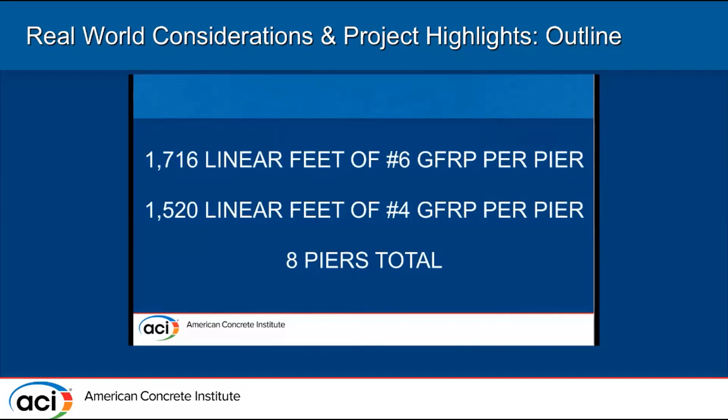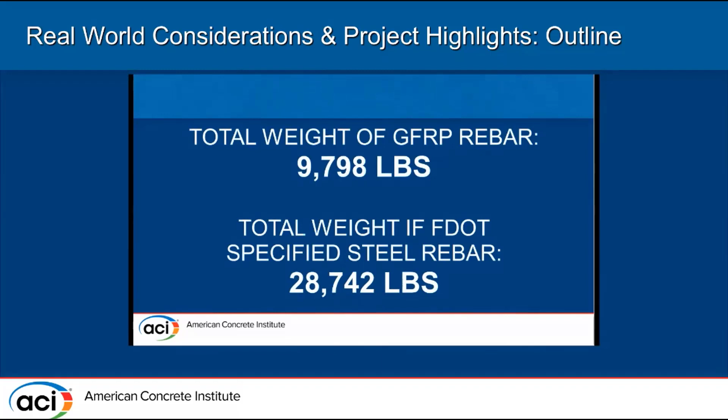So the FDOT hired us to do repairs here because they had some spalling and corrosion that occurred in the tidal influence zone, because salt water impacts that area the most. This part here, you can see the thickened slab. Here we used number 6 bars for our verticals and number 4 bars for our horizontals. It was so much easier to install compared to regular rebar because it was so much more lightweight. We had to tie our divers off, and if you're dealing with big heavy bar in this area with a mat and divers in the water trying to put it in place, it makes it extremely difficult to handle that heavy weight.

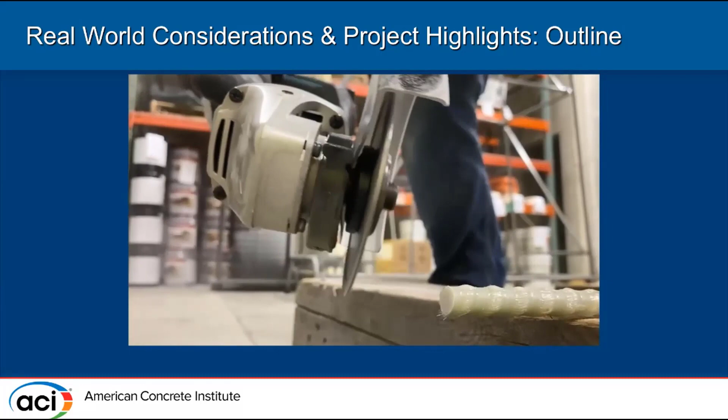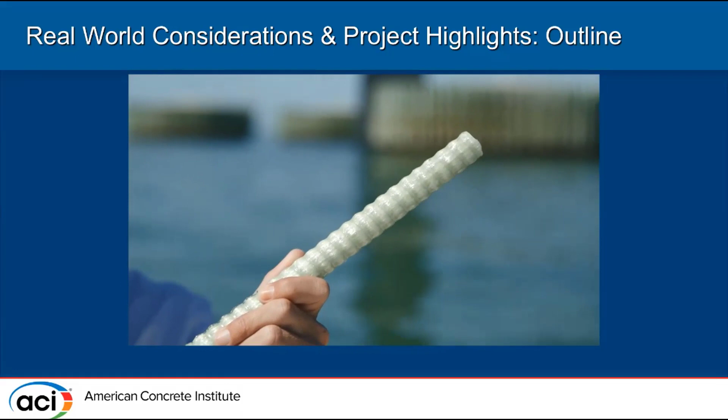So this project was my first encounter with the GFRP bar. Since then, we've been using it on other projects. It was easier to cut. We were able to take it with a grinder and cut it much faster than regular steel. As a matter of fact, by the time we were done with the project, my guys said, I wish we could use this on every project. It's so much easier to work with and it's so much lighter. And when we were pre-tying cages, we were able to set it in the water with our divers. So we had no issues with any of that. Steel bar, we would have.

Yeah. So a big thank you to Mike for providing that testimonial.

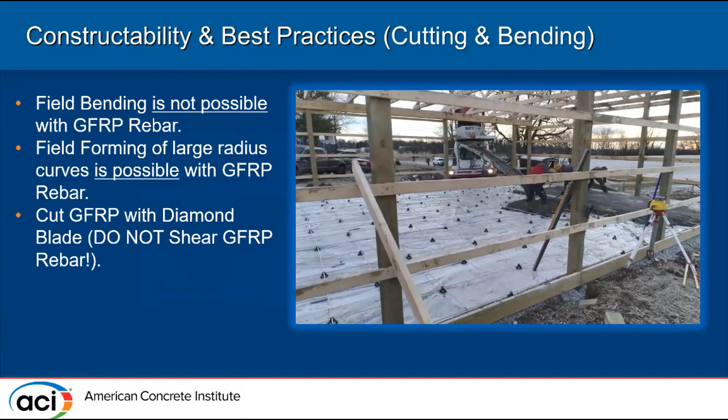But moving right along, constructability and best practices when using this material. What's the actual nuts and bolts? What's this going to look like right there on the job site? We've already mentioned one big difference, field bending. It's made with a thermoset resin, and just by the nature of thermoset resins, there's no field bending with GFRP rebar.

That means all of the bent and fabricated rebar pieces, regardless of manufacturer, are to be made at the factory level and sent to the job site or to the distributor for stocking shapes and whatnot. Field forming of large radius curves is possible with GFRP rebar. And there are some authoritative formulas to be able to keep that within the bounds of serviceability of the actual

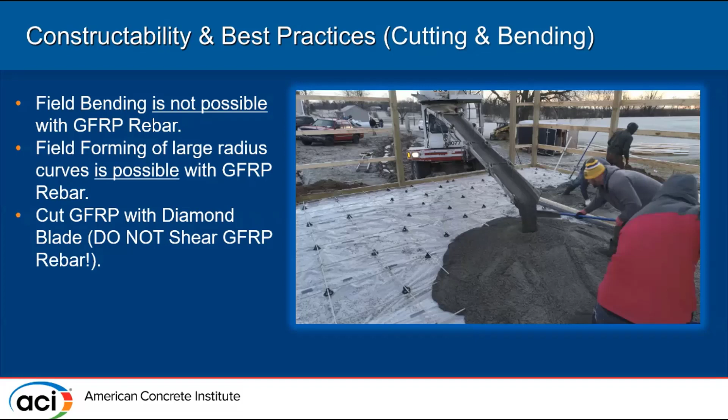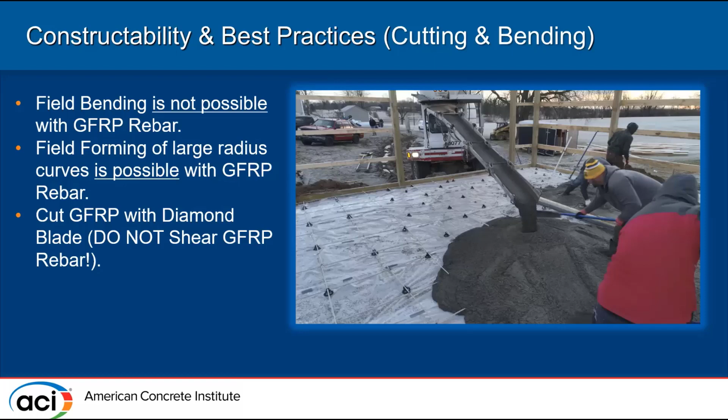bar. Cut GFRP with a diamond blade, we would recommend that. Do not shear GFRP rebar. I've seen some contractors get bolt cutters and cut the stuff. Don't do that, is what we would say to the contractor, because we don't want to damage any of the load bearing fibers going deeper into the bar. So if you shear that with a bolt cutter, obviously that could give some performance issues. But with a diamond blade, it's going to cut right through the stuff.

Moving on. So the bent bars, like we've already talked about, have got to be preformed in the factory. Some key considerations as performance varies from manufacturer to manufacturer. So again, I'm gonna hit this topic time and time again for the A&E community. You got to know your design criteria, and you got to know how to communicate or specify that for the contractor. Okay, so get to know some of the manufacturers, get to know some of their capabilities, and design accordingly.

So currently, some of the quality control, quality assurance currently qualifies bent bars at the bent and straight portions, and you'll see that in ASTM D7957.

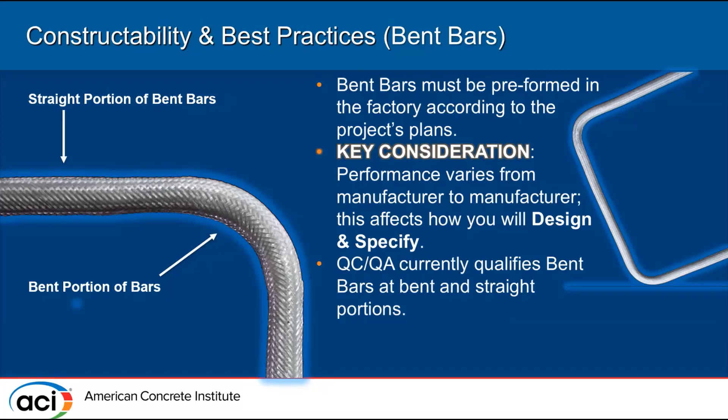All right, so steel ties and supports are acceptable unless otherwise specified in the plans. What I'm talking about is one of the #1 questions I get from a contractor. How do I chair this stuff up? How do I tie the stuff? Well, if the project isn't completely non-ferrous, then the answer to that is, well, how do you tie up and how do you chair up steel? But of course, plastic non-ferrous rebar ties and supports should always be made available as well, right?

And GFRP is typically 25% the weight of steel. So one thing that we see on real world constructability is that floating can occur in some high slump areas or areas where vibration is used within concrete. That being said, that's not an issue for the contractors, because all you do is make sure that you use adequate ties and fasteners in those areas of concern, right?

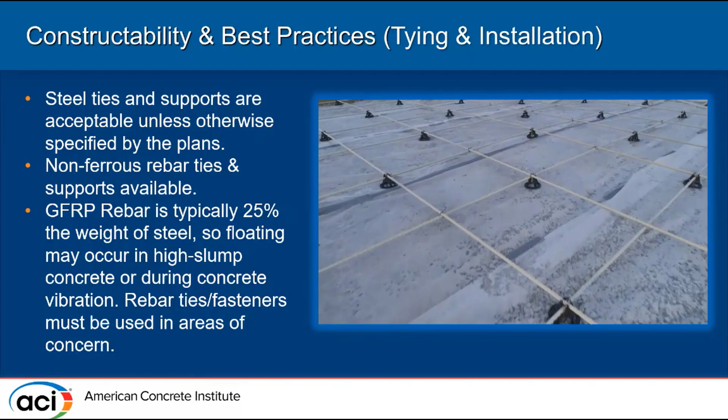So up next, concrete cover. We're going to jump a little bit into that again. So concrete cover, it's a big deal. As David Lai submitted to us, as long as fire resilience isn't the governing design criteria for the member, then by all means, there's no need to use additional concrete cover like we have to do with steel rebar. We got to put a Band-Aid on steel rebar, guys, but for GFRP, it is not so. And again, provided that fire resiliency is not a governing design criteria.

So these are a couple of examples. One is from ACI, one is from AASHTO, but the only reason why I put these up here is just to show that there is codified authoritative guidance on that for us. So this really isn't the wild, wild west. This is the real deal, guys, right?

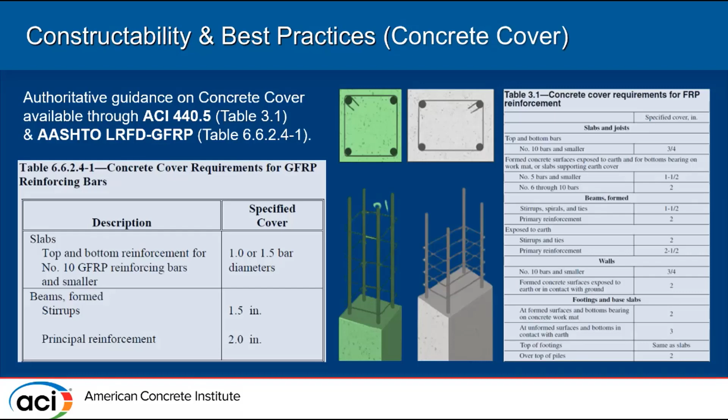So the value engineering process, as we do it. Now, this will be different from company to company, but the value engineering process, some of the key elements to that: communication and planning, obviously, surprise, surprise. So know your contractor's timeline, absolute necessity. And know the project's submittal process and approval process.

Who's the authority here? Is it a DOT project? Do I need to submit this to the central office? Is it a developer making a new development for single family residences? In that case, we would see IRC as the authority. Where is it being done? What's the jurisdiction? So we got to know the submittal process and approval process.

And then our second step is we acquire the structural drawings, the project plans, loading info, any additional information. All information helps. And then what we'll do, after looking at the loading information, is flip the design away from steel design, away from a 318 design, and provide what we like to call at TUF-N-LITE the red line marks.

And what we mean by that is we'll take the drawing and provide the FRP design for that specific load, right? And then other deliverables could include stamps, and that kind of ties back into the submittal and approval process. Perhaps a stamp is required, right? Placing documents, it helps the contractor. We're very passionate about making this technology approachable and making it easy for the contractor to try it for the first time.

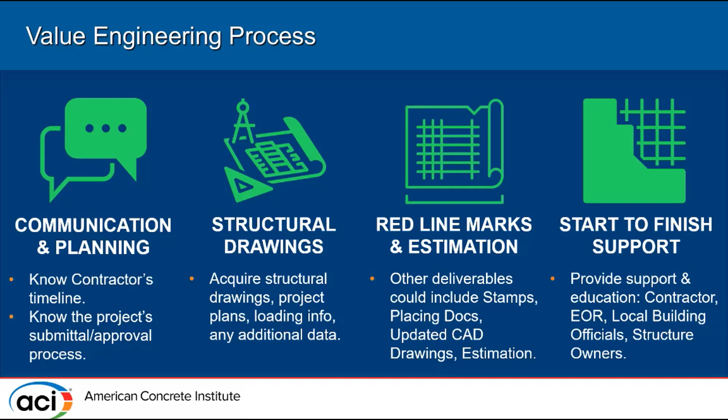Sure, the contractor saves money, great. Sure, they get it on time, and while they're still waiting on their truck of steel mesh or whatever, that's all good and well. But the actual winners when we're able to do this is the structure owners, guys. They're the actual winners because they're going to have an end product that's going to last significantly longer.

So one quick project highlight. We're running out of time. Thanks to guys again, but we had a 300,000 square foot commercial warehouse, steel reinforced concrete design. It utilized rebar sizes 3, 4, 5, and 6. The value engineering was driven by the contractor. The contractor wanted some options. He wanted to know, what can we do?

What's the state of the art right now for this fiberglass rebar thing, this whole thing that I hear about and see? So he reached out. He promoted the idea to the EOR and the owner. The owner loved it. The EOR, we did a lunch and learn with the EOR to bring them up to speed on some of the design codes, right? And I'm pleased to say that they've designed maybe 4 or 5 projects since this project that wouldn't necessarily necessitate a non-ferrous reinforcement.

But they did so because, after really diving into the information, they see this isn't just a niche reinforcement. This is something that we ought to think of as rebar, and then we ought to think of steel rebar, right? You see how I've worded that and phrased that? This GFRP rebar is rebar, or you can go with that rusty old steel rebar. You see what I'm saying? You see the way we're thinking of it and wording it.

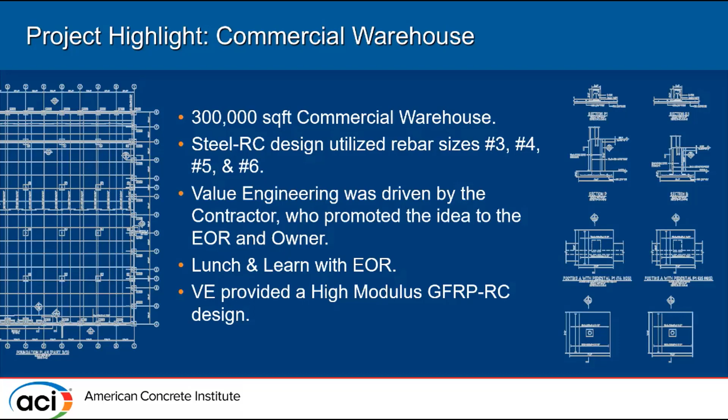But anyway, so we did the value engineering, and we provided a high modulus GFRP design, which is very important to specify when you're designing with this stuff, guys. Let us know, what's the design criteria? What are the minimum requirements of the bar that you're designing with, right? All the steel rebar was replaced by a single-sized GFRP rebar. So there was a single size GFRP bar that replaced steel size 3, 4, 5, and 6. We think that's a pretty profound thing in and of itself, right?

The bar has an ESR under the ICC evaluation service report program, which made this applicable because this was commercial concrete, right? So the ESR was applicable to the IBC, right? So that's where we find that. So the 11,127 pounds of GFRP rebar, which by the way would fit on a pickup truck and a trailer, right, was more than sufficient to completely reinforce this 300,000 square foot warehouse, which replaced 79,194 pounds of steel. In other words, 2 truckloads.

All right. So what are the real world applications of this? How about we get those trucks back on the road delivering something else, boosting some circulation in this country, and we delivered this on a truck and trailer. I mean, you guys see where we're going with this. The implications are huge. The contractor saved 19%. He got his steel quote and he got his quote for GFRP. He saved 19% compared to the steel package.

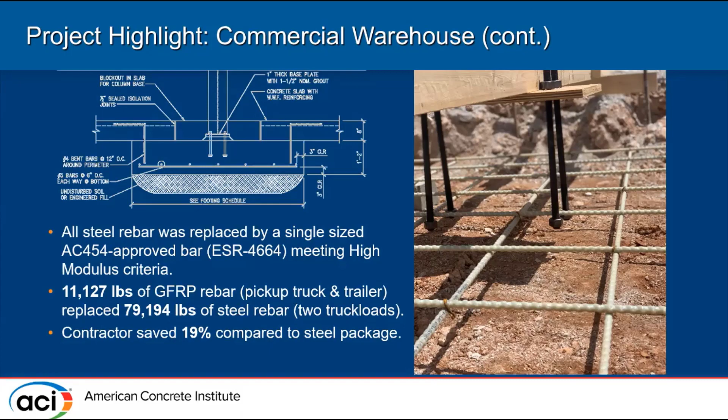Oh, yes. Yeah, we got to jump into the, yep, perfect. Hey, there we go. There's the end. So we got to jump into some questions now. I know we might have some questions online.

Has there been any evaluation for the use of this product in post-tension slabs?

Elevated post tension? It actually behaves really similar to post tension. So it actually is a great complement for the minimal steel you need to add to the post tension. So you get a really well performing product for crack control, even though post tension doesn't really crack. The temperature and shrinkage steel, it's a great opportunity to keep your slab thickness or your slab weight down.

But not necessarily a side-by-side comparison in a test. We don't see that, but there's nothing that would keep you from using it as your minimum reinforcement around your post tension. So we have a question here.

It says, does GFRP have any limits when it comes to deep drilled shaft construction? For example, is there a maximum depth where GFRP would not be favorable? Dave, do you have any idea on that one? So if it's an issue of production length, there's no limit as to the length of rebar that can be produced. If it's something that has to be very long, the rebar can theoretically be wound on a coil.